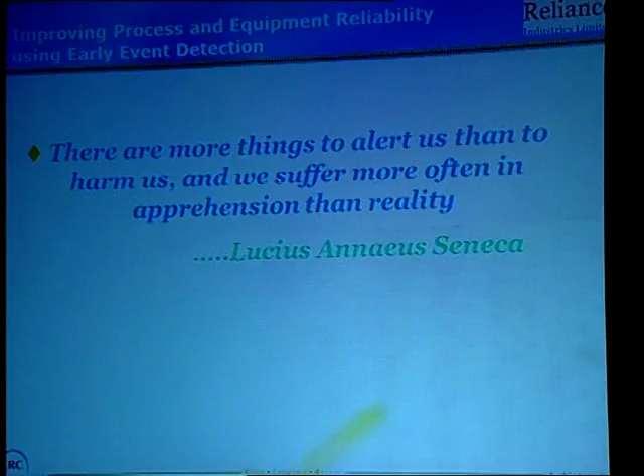Dhirubhai Ambani, who was the founder of this Reliance group and major innovator, I would say. So not only from the polyester sector, we made a backward integration up to refinery, and not only refinery, it is oil and gas. Because in Andhra Pradesh itself, we have our gas well KGD6, one of the main gas producing stations, which is supplying gas to the entire country, many fertilizer plants and power plants.

So few things were discussed, as I am coming from the state Gujarat, although I do not belong there, but the last 15, 14 years I have spent in Gujarat. The major thrust of this forum was on electricity, power, and this thing.

One of the sessions mentioned in today's morning session was the power challenges in power distribution, some related to people. But I am proud to tell that in Gujarat, with maximum utilization of technology, the theft cases have been reduced to 20%, which is the data given by our leader, Mr. J.M. Bhalani, just now.

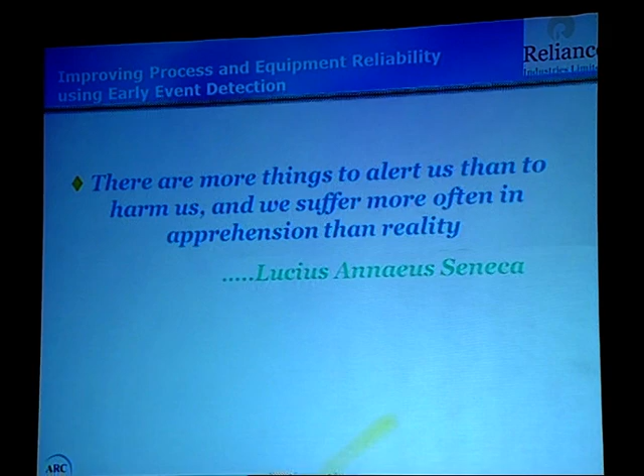And this is really something other states also can follow. Gujarat has set an example over the last 10 years and improved, taking maximum utilization of the technologies available, and those have resolved many issues. Maybe there are operational and implementation issues which will have to be solved over time, but we cannot blame the technology. Yeah, there are flaws.

Yes, technology could be limiting to some extent, but over the period with innovative efforts, we can definitely bring the transformation. Because what I believe is that technology is mainly for transformation, and as far as the social impact is concerned, it is the innovation which brings the social impact.

So the two examples which I can give are from our founder, Mr. Dhirubhai Ambani, who had set the vision of making a cell phone call available at the price of a postcard, and that was India's real transformation. Andy mentioned this cell phone was the biggest revolution. When Reliance got into the business of cell phones and progressively made the call available as cheap as the postcard, that brought the revolution, a big transformation in our country.

And today, a lot of effort is being put in by the ARC advisory committee and the overall global ARC offices, and I'm sure the topics being talked about like cloud computing and manufacturing intelligence are going to create a big social impact in the coming days. Thanks to ARC's efforts in bringing in and percolating the ideas, new concepts down the line.

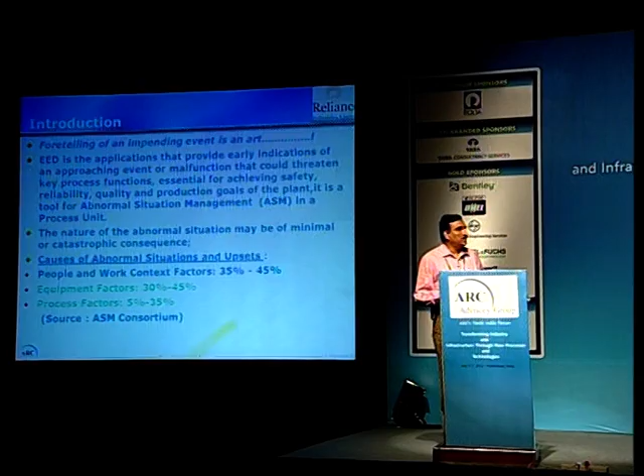So early event detection, for foretelling - if somebody can predict what abnormality is going to occur, and save thousands of dollars worth of equipment, worth of process, worth of plant - then definitely this is really an art.

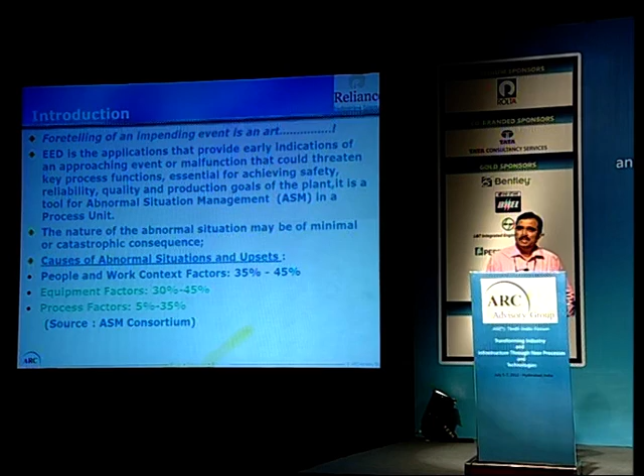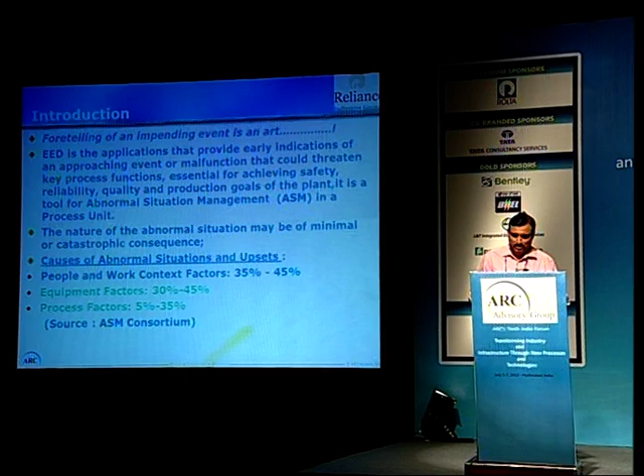Today I'm going to talk more about the concept, because I'm not saying we have implemented it to the fullest scale as far as our refinery is concerned, but this is going to be the most important area. Over the last more than 1 year, we have been receiving many early event process cases from our user base, but for want of a full technology platform, we are not able to implement to the fullest extent.

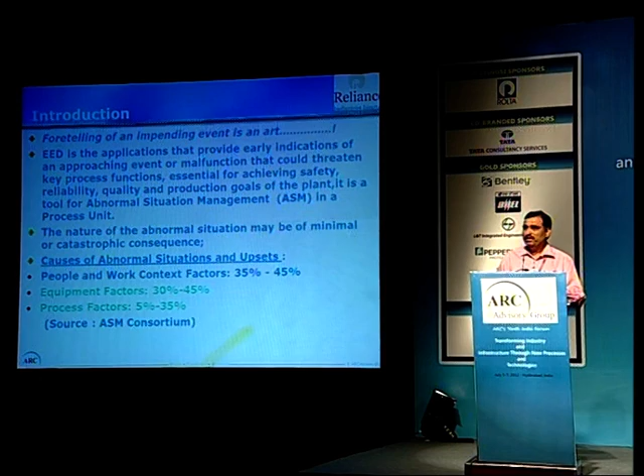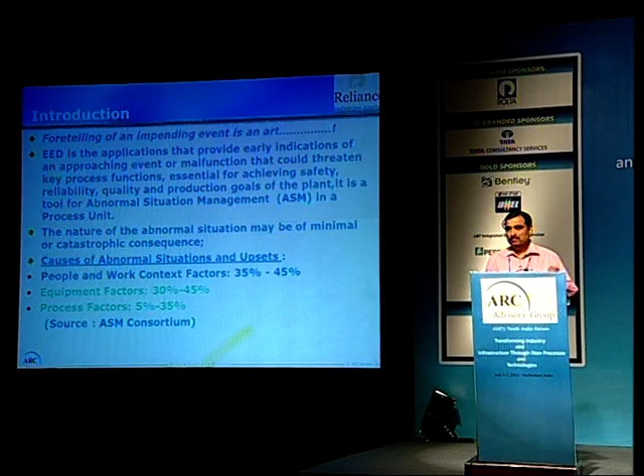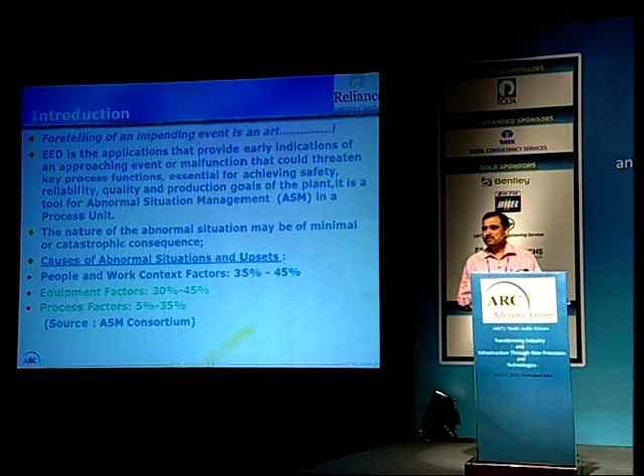So I am going to take this up, either with the ARC forum or the vendors available here, so that at the end we have a comprehensive tool - something that will give an idea of what type of platform, what type of problem we are looking for. We have given some pilots or proof of concept with companies like Honeywell, and maybe in the coming months or years we will get a full comprehensive tool for this early event detection implementation.

As we talked about, this is a concept floated by the ASM Consortium, and a couple of vendors like Honeywell have contributed a lot to this ASM Consortium. Any abnormal situation could have a minimal impact or could be catastrophic.

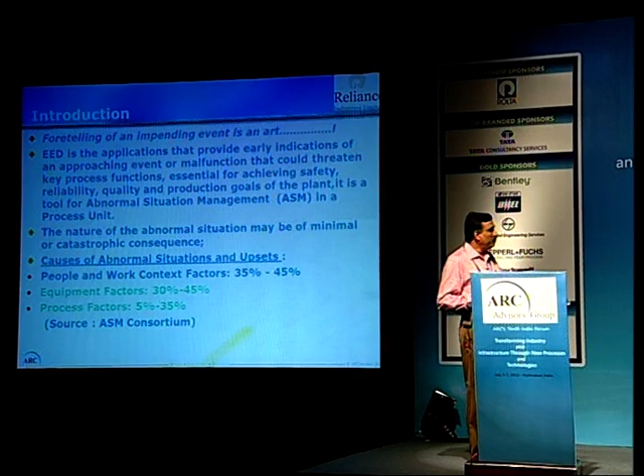As far as statistics are concerned, any abnormal situation in a process industry is mainly 35 to 45% due to people and work context factors, 30 to 45% due to equipment, and 5% to 35% due to process factors. So it may vary.

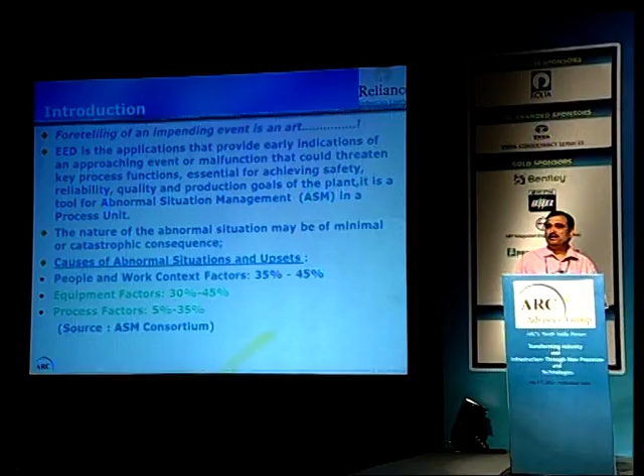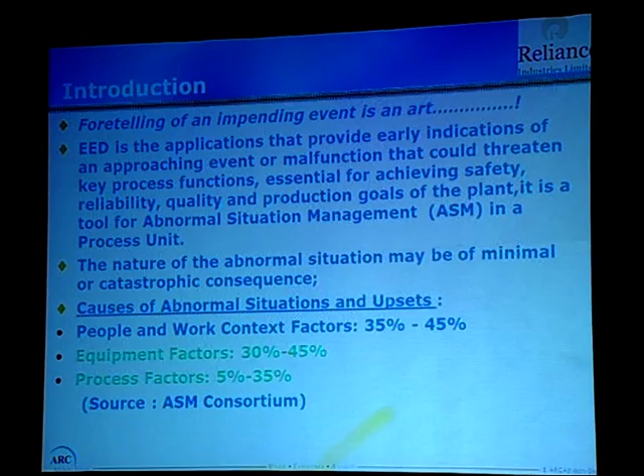The earlier I get the indication of any impending event, the more I can take proactive action, which may lead to some downtime of my unit for a short duration. But the proactive action I take is going to save maybe the disaster which would happen after hours or maybe a few days. So this is how early event detection will be useful.

So EED is meant to augment the console operator, because the console operator is the main player, the focal point for the whole plant - whether for the plant manager or production manager. So all the information, he is the focal point with respect to the plant. For him, this is going to create behavior and situation awareness, because a lot of information is currently getting loaded onto the panel.

This is also one of the concepts. After alarm rationalization, that was not the end. So our focus now is on predictive monitoring or predictive alarming, which will further strengthen our plants, our equipment or assets going forward. From the last couple of years, we have also been driving business transformation in a big way, and as part of that we will focus more on this, which will finally improve our asset life and the plant life.

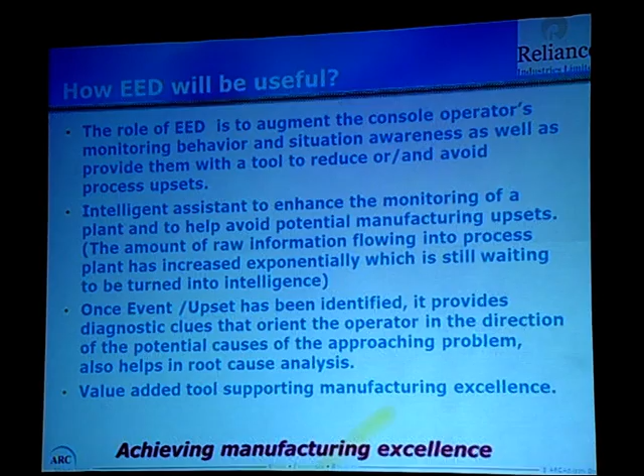So what we are looking for is a value added tool supporting the final goal, which is manufacturing, to achieve manufacturing excellence.

So the problem, if you ask me, I would describe it as process industry encountering failures, which includes starting from small instrument failure, or it could be process drift or safe operation violation. It could be exceeding limits beyond the target, or major unit deviation, and catastrophic failure.

It could be some failure, fire, or maybe equipment rupture. So the challenge is how we get early indication that an event is occurring, that the process is changing, and what sensor or piece of equipment in the process is the root cause of the abnormal situation. So I need some good analytical tool.

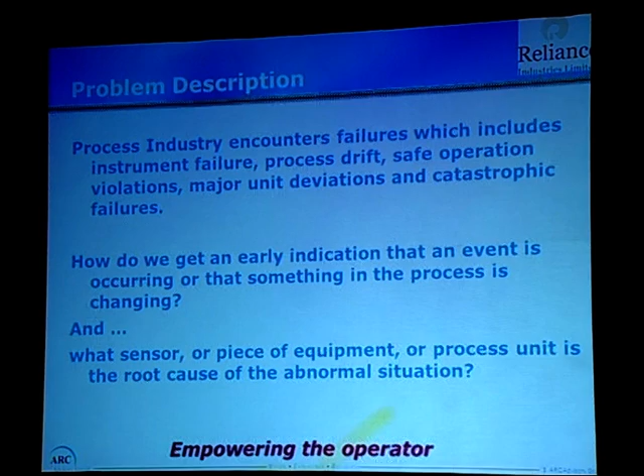So today, for want of some comprehensive tool, whatever resources I have, say DCS control configurator or some APC, advanced process control, whatever systems we have, I have to utilize those to develop some advanced logic, and based on that try to get early event detection.

So I am not saying we are currently doing this in the most professional way. Maybe in the coming days we are looking for a good solution. So whatever I have to request, either to the ARC team or the vendor team available here, if they can give a solution in the coming days, that will definitely be useful, not just for our units, big refinery units, integrated units like Reliance, but for the overall process industry as a whole.

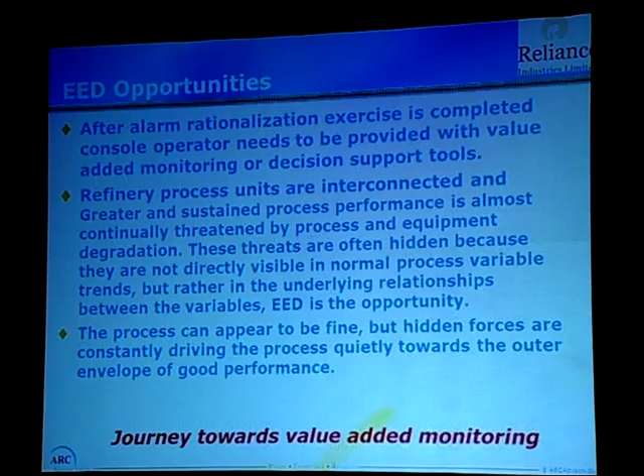So if you could see, as far as refinery is concerned, I talked about alarm rationalization. Then for refinery process units, here is why it is more advantageous. If you see, right from our crude processing unit up to the final coker unit, all units are integrated, and any abnormality in one unit can have a drastic impact on the subsequent or downstream unit. So the earlier the information is provided to the downstream unit, he can definitely take proactive action.

So although we have good DCS or systems, not necessarily every abnormality is routed, for want of network, due to some network limitation. All abnormality information we are not alerting to the operator who is not directly connected, but he is going to suffer maybe after a couple of hours, or the unit is going to suffer. So that type of information is definitely going to be useful for the units as well as the process, or the assets as a whole.

So this is how early event detection is going to improve reliability, by finally making the operator more proactive than reactive, because getting the information earlier is definitely going to give him time to think over it, to consult with his superiors, rather than getting information after a disaster has already happened, which may further deteriorate the situation. So proactive information is a very important factor.